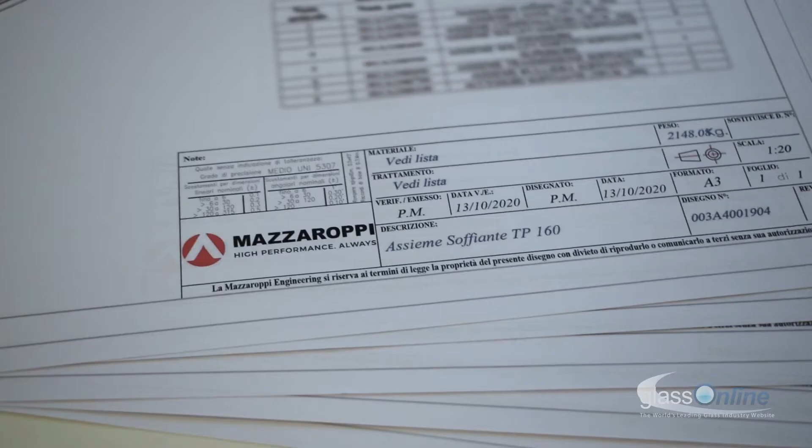Making exceptional products, experimenting, innovating, patenting, and never compromising on quality are essential requirements, but it's not enough. We believe in the importance of cultivating a special relationship with each customer, not by focusing only on the single sale, but looking for partners who will share decades of history with us. Our machinery is designed to last from 20 to 30 years, often even longer, and we are committed to provide assistance to our customers at any time, as long as our products are in use.

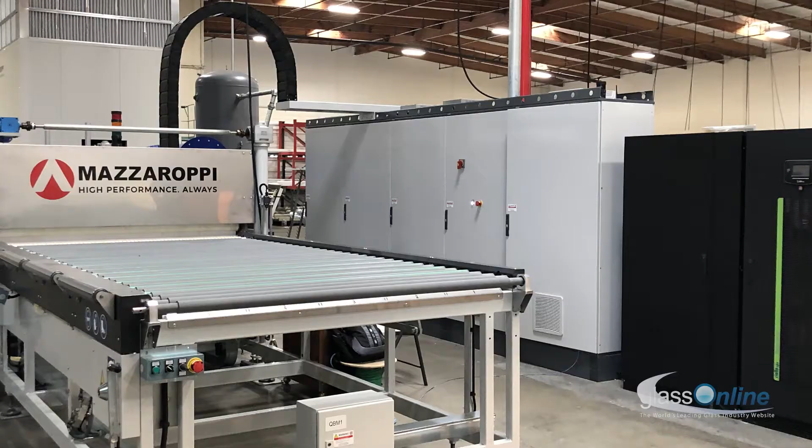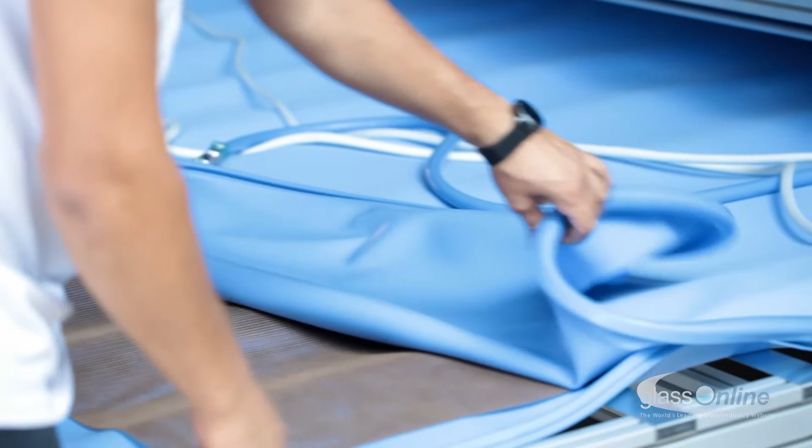We are always at their disposal with our technical support. We listen to the feedback and suggestions, and we strive to make each generation of products more suited to the needs of our clients. Our services will continue to evolve, adapting to the needs of our customers and their problems and successes. Turning every new customer into a lifelong business partner is an integral part of our philosophy. We have clients with whom we have been working for over 30 years. That's why we pay particular attention to after-sales support and customer care.

All of our machines are remotely connected to our operation center, where specialized technicians are able to respond to customer needs and monitor each single machine. Furthermore, in case of breakdown or anomalies, we are ready to intervene immediately on-site all over the world if required.

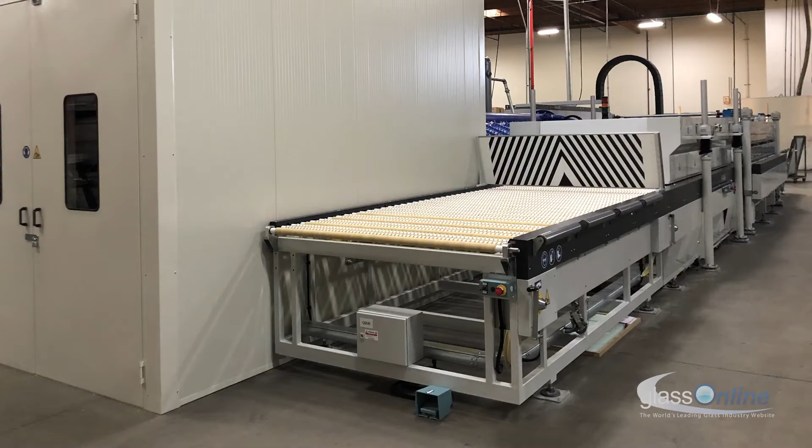My next question is about your compact furnaces, which are your new generation of furnaces. What are the main characteristics? We designed the TP Compact thinking of all the small and medium-sized glass factories that would like to have their own furnace, but don't have such production that can justify the purchase of massive large tempering furnaces. That's why most small-sized glass makers outsource the tempering process, losing control of this process, but most importantly, losing control of the timing and quality of the final product.

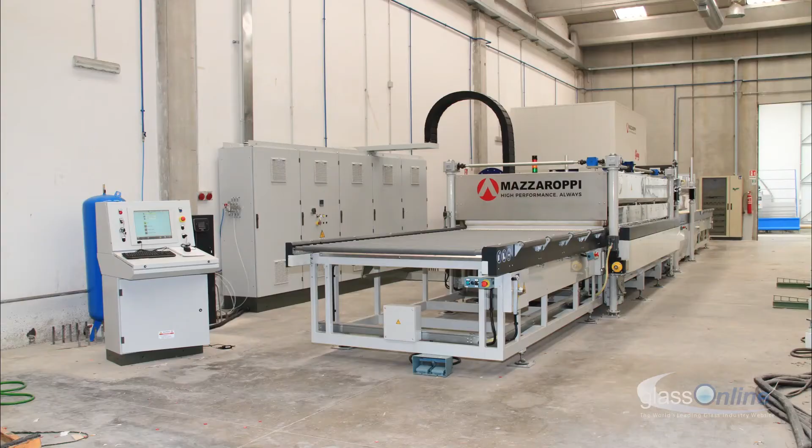The TP Compact is accessible to these companies thanks to its small size and its average consumption of about 100 kilowatts per hour. Thanks to our continuous development, we achieved a further 30% energy saving compared to the previous model. It makes the payback period of the machine shorter than before, thanks to a reduction of production costs, fixed costs, and not to mention the initial cost of the electrical infrastructure.

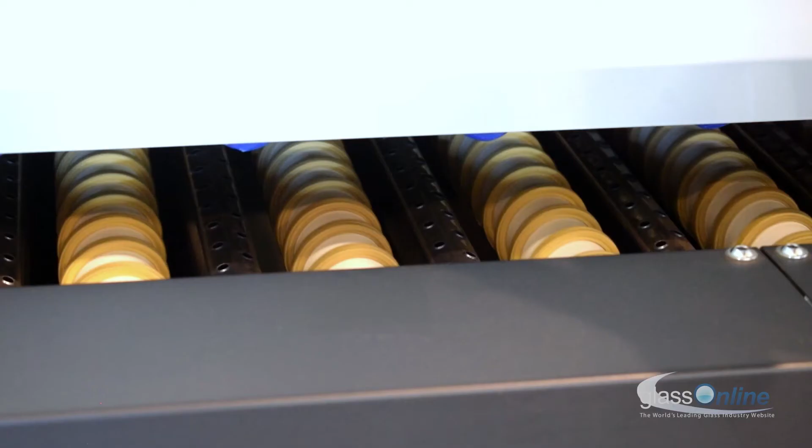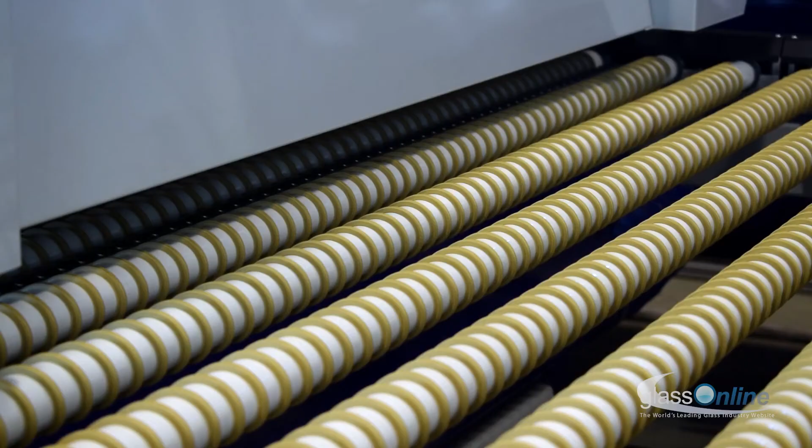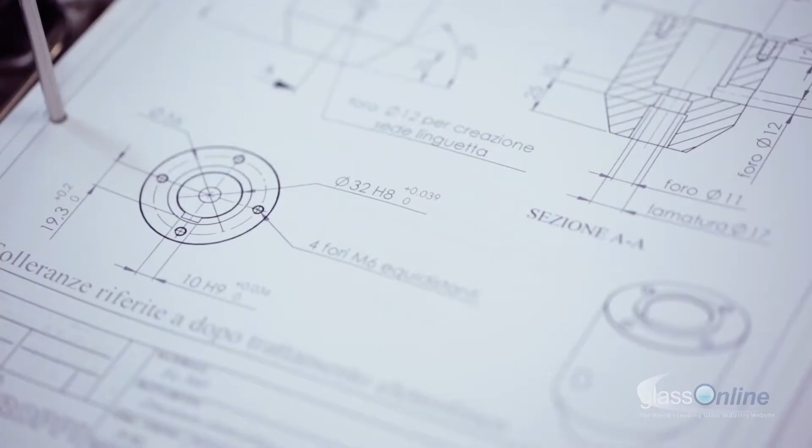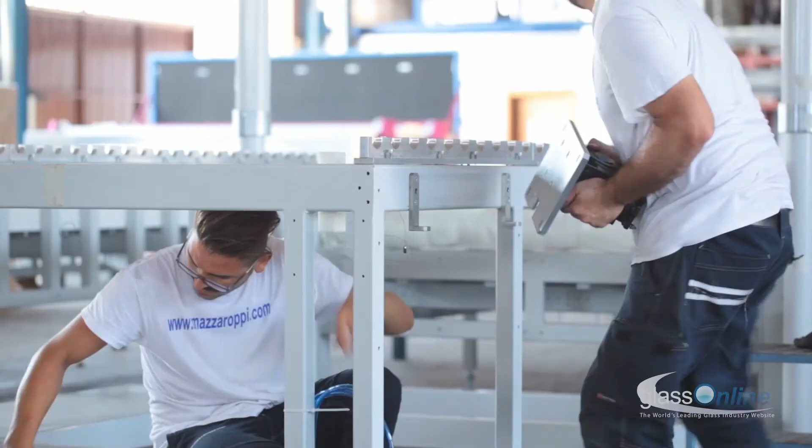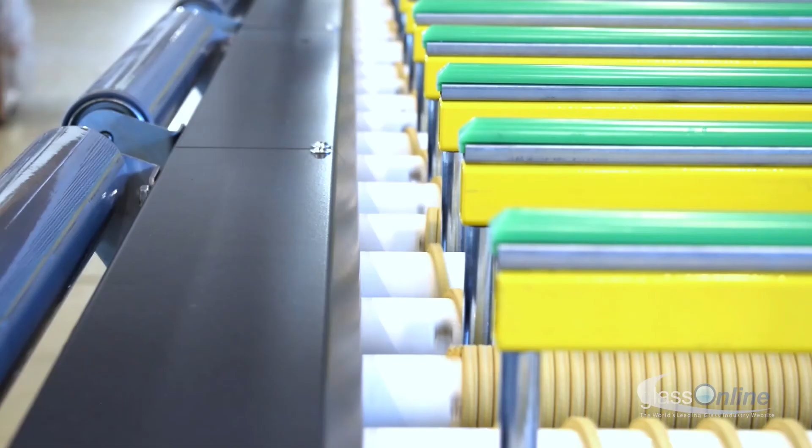The TP Compact is produced in 3 standard sizes: 1.3 meters by 2.6 meters, 1.3 meters by 3.6 meters, and 1.6 meters by 3.6 meters. The entire installation process, managed by our team, lasts at maximum 15 days. This period includes the training taught by our staff that the client will need to use the machine safely and effectively. Our product can handle any glass thickness between 3.8 mm and 19 mm.

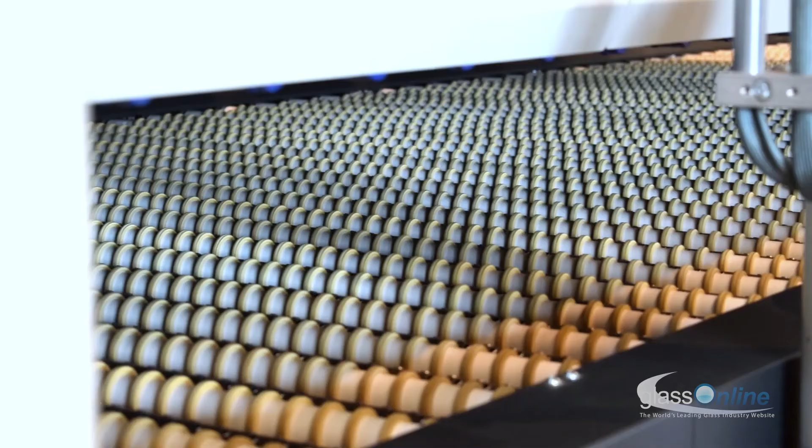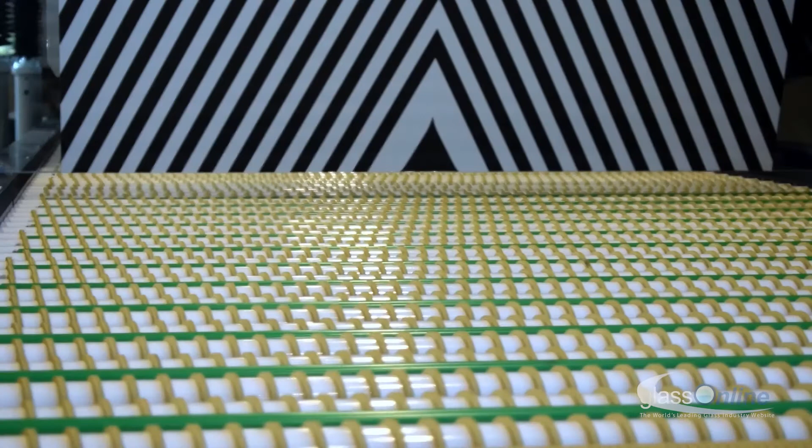And can temper any type of flat glass: float, reflective, enamel, silk screened and processed, including low emissivity glass, even the latest generation up to 0.01 emissivity, and without getting a headache doing so.